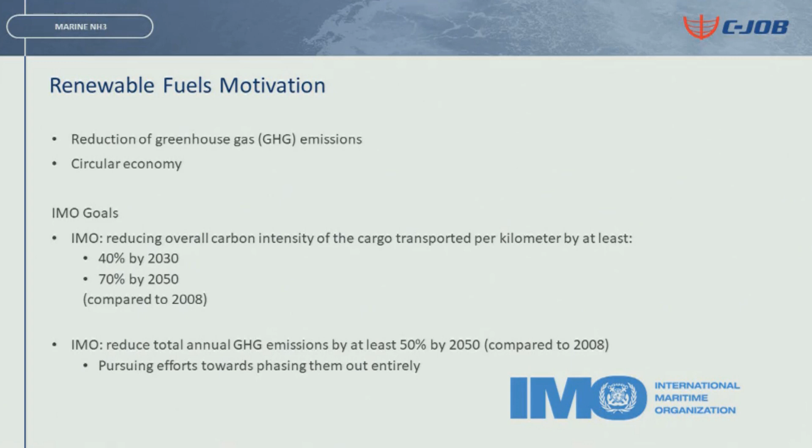Then when you look into ammonia, ammonia is actually not really well known as a fuel. Just keep it here - normally I'm used to walking, but sure.

Ammonia is mainly used as a compound, a vital compound for fertilizer, and global production is passing 180 million tons. So it's very well scalable, it's all synthetically made. Of course, this is still the gray method, as we consider, because the hydrogen used to make ammonia is obtained from natural gas, rather than the preferred way in the future where it's green ammonia, where hydrogen is obtained from electrolysis of water, preferably again with renewable energy.

Nevertheless, ammonia is ammonia, either way it's produced, so the knowledge and experience in these industries is very valuable to translate it to a fuel. Furthermore, it's used in cooling systems and also in DeNOx systems, which is then again in the form of urea, a CO2-ammonia combination, but also a very known technology.

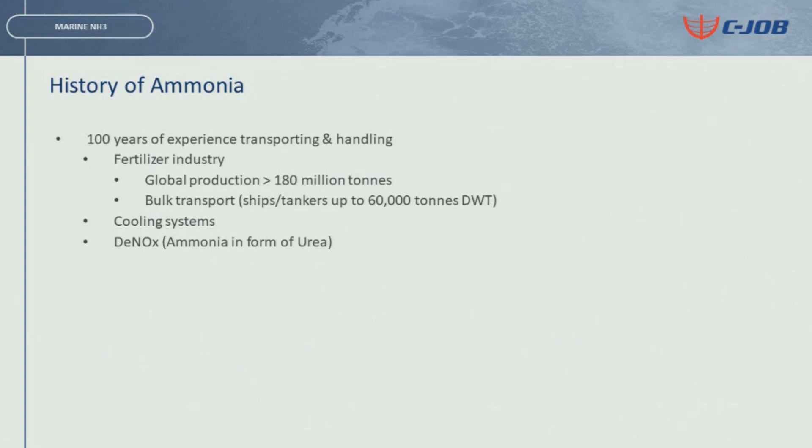Then some history. The oldest one I could find is from 1935, the director of Casale, which is an ammonia plant producer. These guys have ammonia plants, and instead of going to a petrol station, he thought: I have my own ammonia plant, I'll let my car run on ammonia. He did so by cracking part of the ammonia back into hydrogen, making ammonia-hydrogen blends, comparable to methane combustion properties, and then indeed combusted with spark ignition.

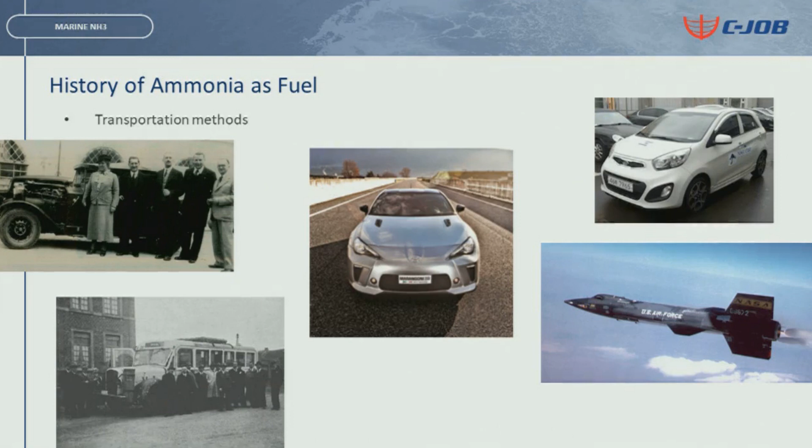Also, with the lack of diesel during the Second World War in Belgium, we see ammonia coming in, and also in the more modern applications, most of them dual fuel, are very technically feasible.

So then, why ammonia of all renewable fuel options considered? First of all, I would like to say a few words on bio versus synthetic. Of course, bio has a lot of potential in the near term, as the availability is already there to some extent, but the scalability is somewhat limited, and also not all bio is fully carbon neutral. So I definitely think bio has a part to play and a very good role, but then again, looking at the maritime industry, we'll need to diversify and share the market with different fuels.

Then when you go to synthetic, which is better scalable, you run mostly into these types of options. The most well-known one, of course, is liquid and compressed hydrogen.

For the record, this is without the consequences of a tank, so the mass of the tank and the shape of the tank are not included yet in these parameters. Nevertheless, the main parameters are very clear with the conditions you need to store it in, but also the cost, which is sometimes overlooked, to produce it. Because when we look at it, hydrogen has a clear disadvantage in volume, but in production cost it's one of the most attractive, considering it's the main simple and short compound you can make.

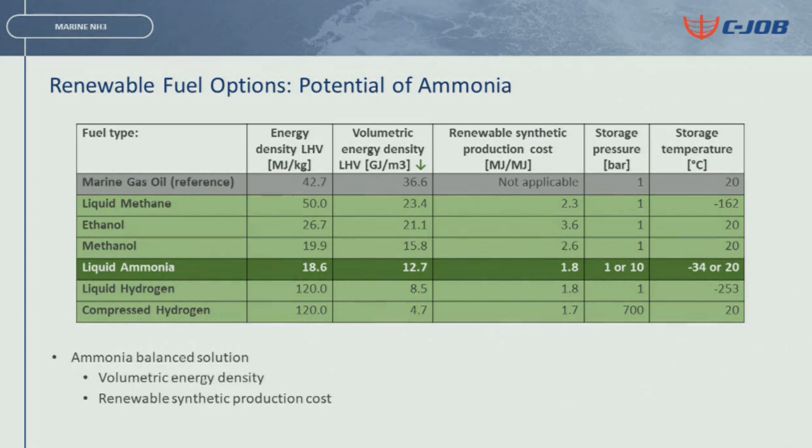So that's the reasoning behind ammonia. Now we go into technical feasibility, and to look at it, we first need to realize what ammonia is. Ammonia is a flammable gas. Yes, it's relatively harder to ignite because the lower limit is quite high - one of the highest lower limits I've ever found compared to other fuels. Also the bandwidth is not that wide. Furthermore, the auto-ignition temperature is very high, it has a low flame speed, and it consumes a lot of heat when it evaporizes from a liquid to a gas, which is not the most favorable property you could have as a fuel. Nevertheless, it can definitely be done.

Furthermore, of course, it's highly toxic. Small note on that, you can also very easily detect it, because everyone can smell ammonia when it's above 25 ppm. Of course, when it's too high, beyond 3000 or even higher, then you might not even notice it by smell, but you might notice it by other symptoms. Anyway, I wouldn't recommend that. So you notice it at a very early stage, and that's vital.

Then, considering these flame properties and the possibility of cracking hydrogen out of ammonia, ammonia hydrogen mixtures are also considered within this study, because ammonia hydrogen mixtures definitely improve all these flame properties and are capable of replicating those of methane - again lessons learned from LNG, very vital to make the next step.

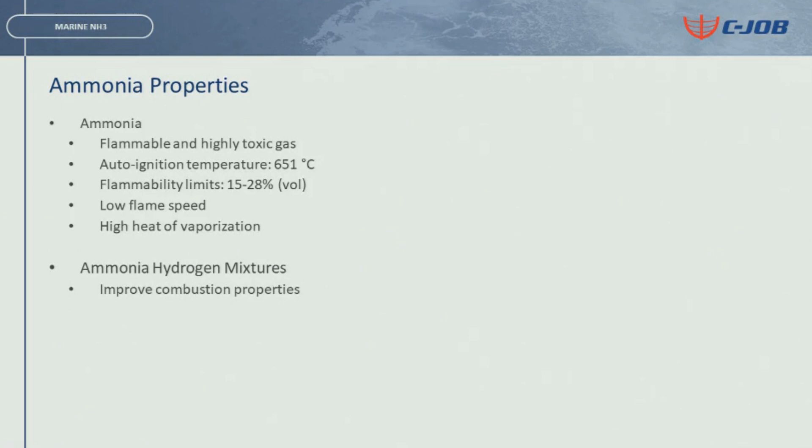Then we basically drew down everything we knew - or I drew down everything I knew - about how you could convert it. So we start with the steam turbine, which is very old-fashioned, of course, but yes, with ammonia you can burn ammonia. With the heat you can make steam, and steam can propel a steam turbine. So yes, this could be done. Then we have a gas turbine, more efficient and more compact, definitely. Then of course the very well-known internal combustion engine, both compression ignition and spark ignition.

Then we have fuel cell technology, of course, more and more. Then we have the PEM, which is already quite mature and already applied in cars, buses, heavy trucks, but also submarines. So this is becoming more and more into play, but then hydrogen storage is the bottleneck in that sense. So if you can work with pure hydrogen, PEM is a great solution. If you don't have pure hydrogen, it might be very tricky because you need to crack and purify your ammonia. PEMs do not tolerate ammonia that much - it's down to below 1 ppm, I think it's even 1 ppb, so that's parts per billion. It needs to be very pure because ammonia will pollute your PEM.

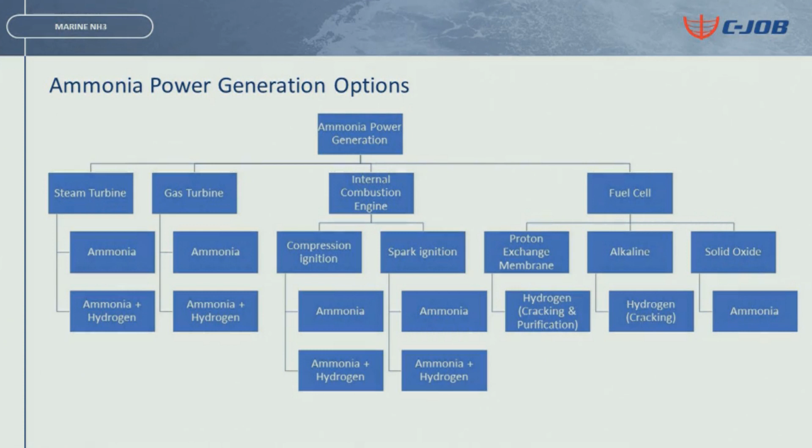Alkaline does not require purification, but does require cracking. And then preferably, of course, the solid oxide fuel cell, which can handle ammonia directly. Well, long story short, they're all feasible, technically. If you're happy with the performance, that's an entirely different matter.

So, looking into what we're talking about here, ships - and in this case specifically the ammonia carrier - because in our view, one of the first vessels which will use ammonia are the ones already carrying it. Of course, you will not find ammonia carriers on marine traffic because they're all camouflaged as LPG tankers, because ammonia and LPG again have a very nice bond, because the storage conditions are very similar. So again, lessons learned from those, and also engine developments on the LPG front can partially be applied for ammonia as well.

When it comes down to converting ammonia into power, we see the ammonia hydrogen blends. In case you only consider renewable fuels, ammonia diesel I will come to later. Ammonia hydrogen blends are the most interesting.

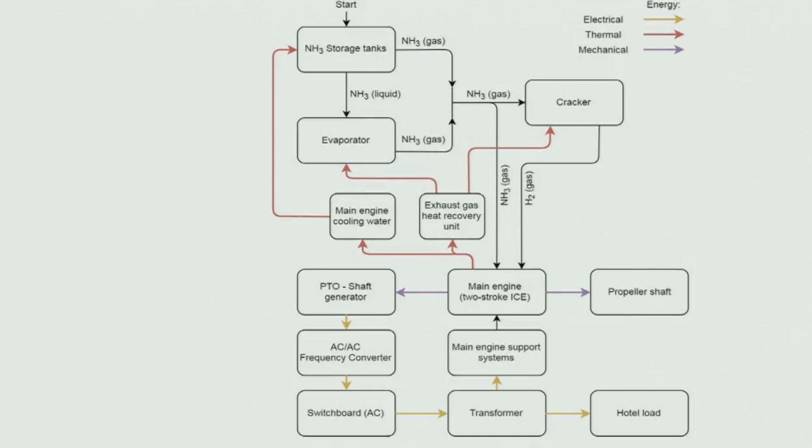Before going into fuel cells, I would like to address the most, or at least from the public's point of view, the most concerned topic for ammonia, which is NOx, and possibly also N2O. Going into this, it was very nice to see that when you study IMO Tier 2 levels, the scale of the engine doesn't really matter. It's mainly the operation, so the rotational speed of the engine.

When you go to experiments done in the past and present for ammonia, so real tests, but also, of course, experimental studies, they show that actually the small engines on high speed do very similar when it comes to ammonia hydrogen combustion. So to say something about this, we need to understand why these are in similar ranges.

When you look at the physics, we of course expect more NOx in a sense because we have more nitrogen. Nevertheless, the average temperature of the entire exhaust gas with ammonia and hydrogen is lower compared to diesel. Furthermore, with ammonia hydrogen combustion, it's a homogeneous blend. Where diesel is sprayed out over a wide area, ammonia hydrogen is more homogeneous, so also peak temperatures are lower.

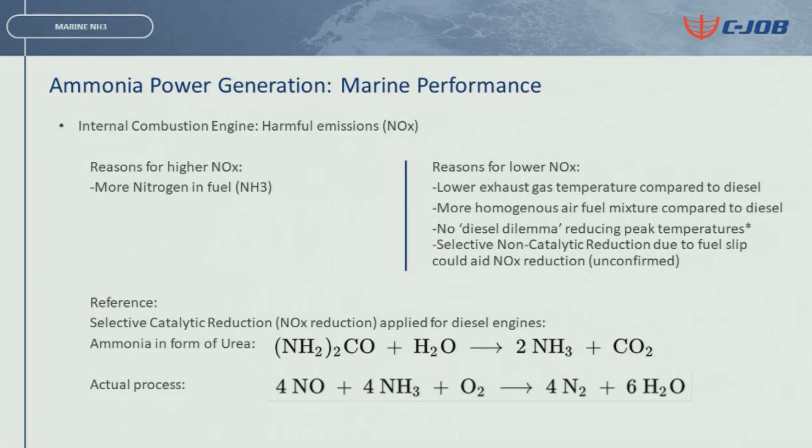So from a literature study, based on that, we conclude that for now it should also still be in similar ranges. It could very well comply with IMO Tier 2, or just about.

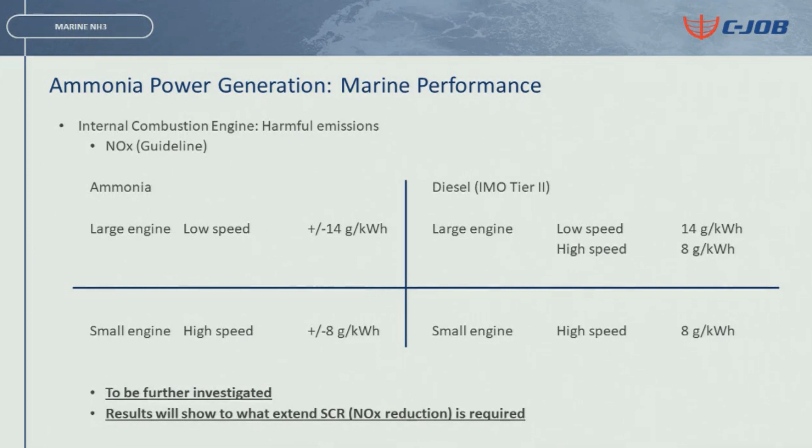But either way, to comply with IMO Tier 3, we definitely have to have SCR, which is fine in my view, because ammonia DeNOx systems are already commercially available, they run very well, and they run on ammonia in the end. So we didn't see a big issue there. It also, in that sense, covers the ammonia slip if you might have it.

Onto fuel cells. For fuel cells, again, we have the same output, so propeller shaft and hotel load. But again, this is the point, because you're converting a ship which is sailing fuel direct, or diesel direct, more commonly known, to a fuel electric configuration.

So the losses of the electrical system are an addition in this sense to the fuel cell configurations. However, when the ship is already fuel electric, fuel cells might become more interesting earlier.

Nevertheless, you see the electric system, but also the cracker, which requires heat input because the PEM is a relatively low temperature, so this is a loss.

Also the purifier needs to run, so also that is a small loss. And of course they require space, but in energy sense it's less efficient due to these parts.

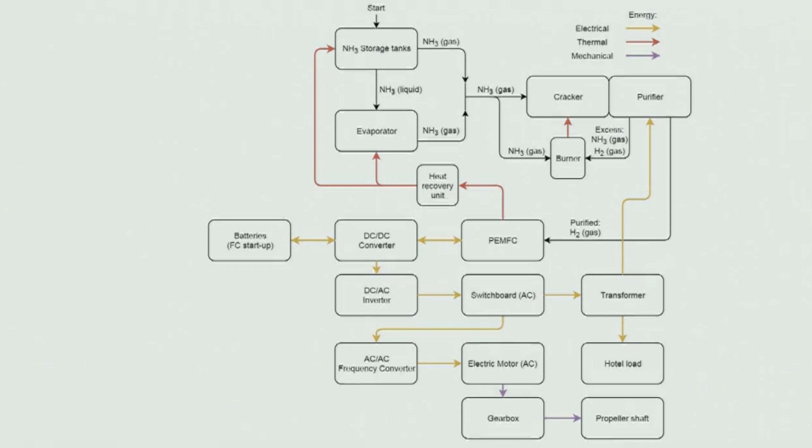But still, if the PEM is still efficient enough, it can do very nicely. Moving on, the alkaline fuel cell has a similar setup, only no purification.

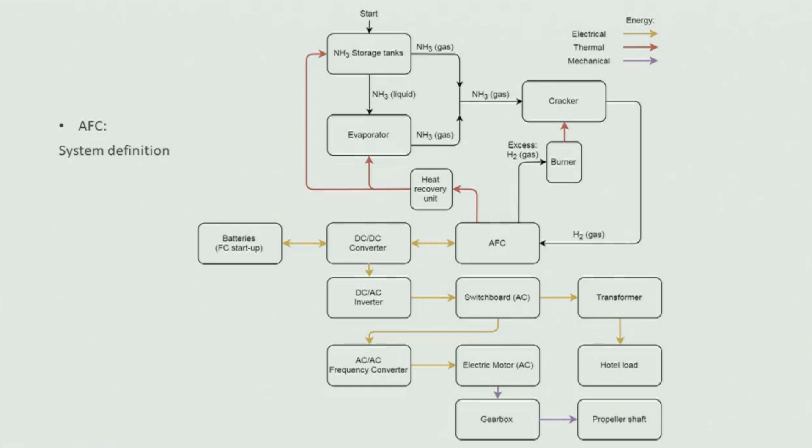And then the most preferred fuel cell in my view, which is the solid oxide fuel cell, can completely drop everything here and focus on direct usage.

Then, when you start comparing them—and of course this is with a note, because the solid oxide fuel cell is going through a lot of developments, of course all fuel cells are, but especially with these notes, this is a moment in time, and also with certain assumptions.

Because I was already told that the load response for the solid oxide fuel cell for some technologies is already at similar levels as internal combustion engines. However, if that be so, they were not able to tell me what the consequence of that was to the power density.

So it really shows that the solid oxide fuel cell has a lot of potential, but still has to become more mature to be actually implemented.

It also shows that the others are quite well performing overall, and we'll get to efficiency in a minute. And still, of course, some emissions remain with the internal combustion engine.

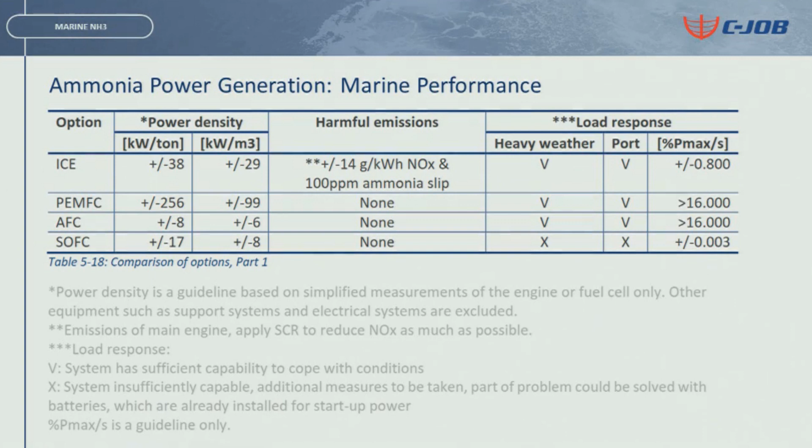When you look at the system efficiency, we see that the solid oxide fuel cell in the end wins it, or is the best compared to the others. Nevertheless, it is also very costly at the moment.

So even though it's more efficient and it compensates its higher capex with lower opex in fuel, it still doesn't beat the internal combustion engine today.

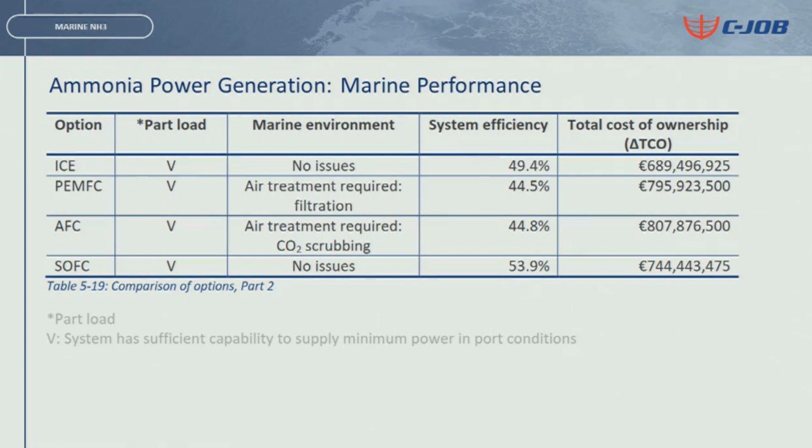So, long story short, we see that the internal combustion engine is the way to go for now, and the fuel cell has a lot of potential for the future, but needs to become more mature. So if you would like to use ammonia within the near term, you definitely have to stick with the internal combustion engine.

Then it is of course an interesting discussion to compare compression ignition, which would be homogeneous charge compression ignition, which has its own challenges—I could also elaborate on that, but for the sake of time I will not. Of course spark ignition will offer you the most flexibility in operation of the engine.

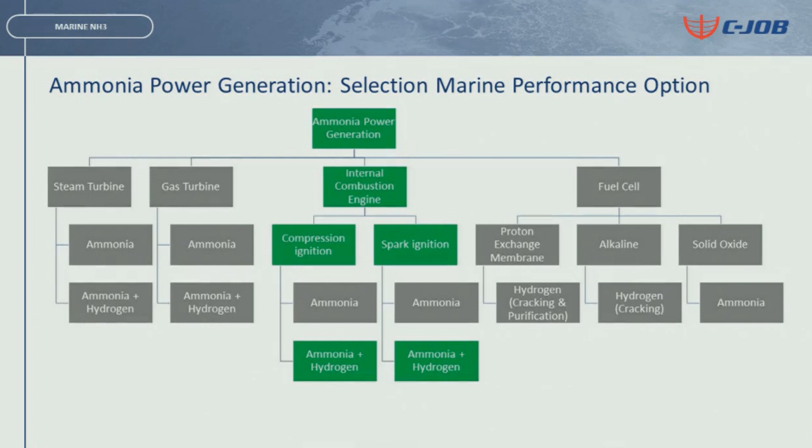But either way, this is something to be further investigated. For now, the internal combustion engine definitely seems the way to go.

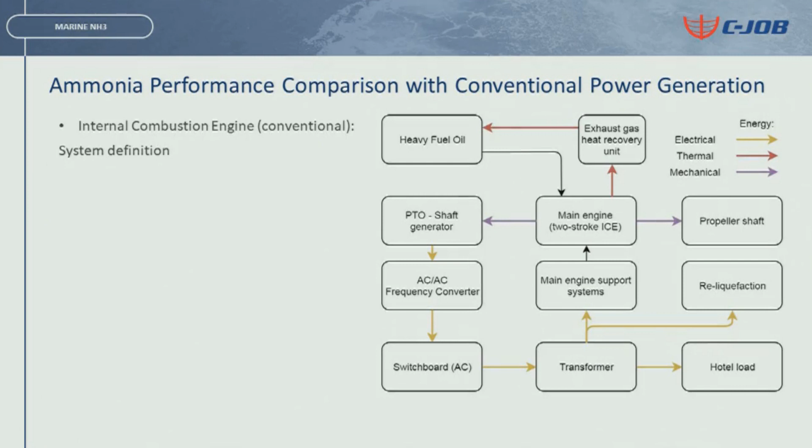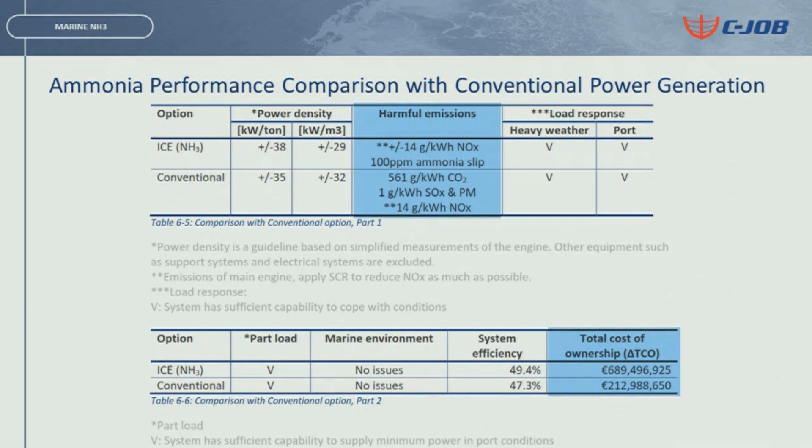So it was a conservative ammonia price of 850 euros per ton. In respect, grey ammonia costs about 300 euros per ton now. And there are numerous places already which can deliver green ammonia at around 400 as well, so then it becomes really competitive. Because when we look at cost to a further extent, this is making it more interesting, because some places are already capable of delivering green ammonia around these ranges. Of course, they need to expand and grow, but the pilot plants are definitely there.

When you introduce added value of clean transport, for example, by means of CO2 taxation, you can level the playing field quite nicely. So these are aspects to consider, because in the end, for now it's not economically feasible. But if a ship owner finds a cargo owner who's willing to pay more for clean transport, it could make a world of difference, because transport costs for most products are just a very small amount. However, for the ship owner, it's a huge difference.

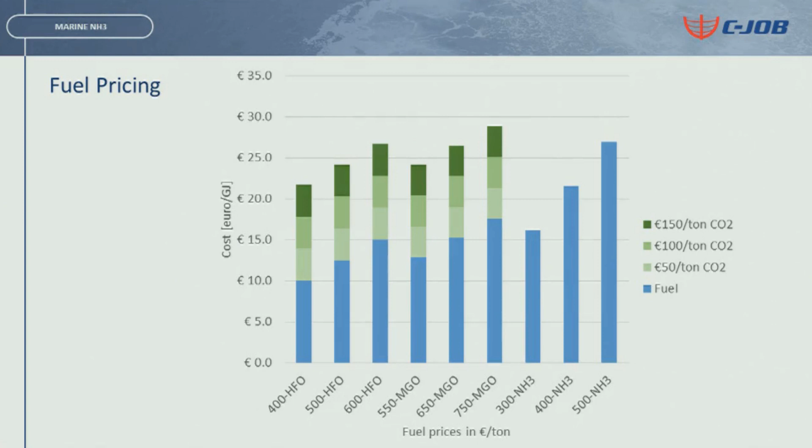So that's the first part that could help and accelerate the adoption. Furthermore, of course, making fossil fuels more expensive could be very helpful. And next to that, the main bottleneck at the moment is the amount of renewable energy. If we expand the renewable energy production, costs will go down, and also the renewable fuels made from green electricity will go down as well.

However, to make such a jump is quite radical for a ship owner. Ship owners are relatively conservative, and I understand that, because they make huge investments, they need to work with them for 20, 25, maybe 30 years. So to be able to fall back on reliable technology, which they know, is very important.

And ammonia diesel does enable this, because in case the ammonia system would fail or not work in any way, you can always go back to full diesel combustion, which guarantees the operation of your vessel, which is vital. And with ammonia diesel, you can go to very high ammonia blends. Think about 95% ammonia, 5% diesel in terms of mass, which is definitely feasible. Then you already have significant reductions.

Of course, as long as you have an internal combustion engine, you will definitely require SCR, but this can definitely be arranged. So ammonia diesel is a vital intermediate step. It could also be considered that you skip this step by extending the ammonia diesel period and awaiting solid oxide fuel cell developments. Either way, lots is ongoing, but definitely ammonia diesel seems to be the first station for ammonia.

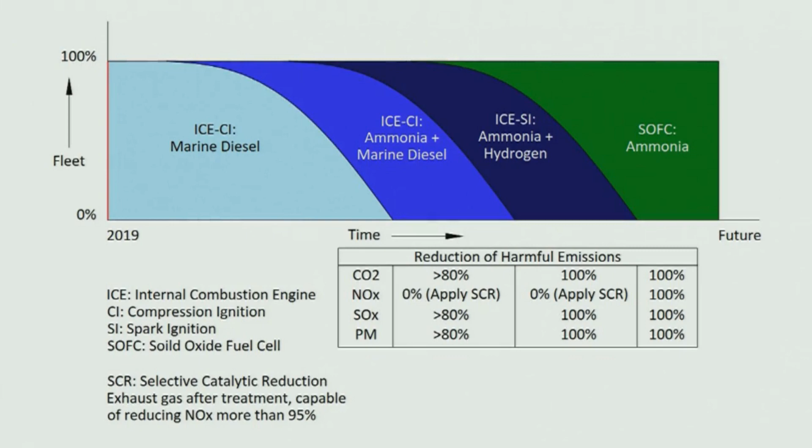Then some words on safety. I will start with this because safety is quite a perceptive definition, because they all seem safe. This is an industry we've done for years, and also new industries offshore done for years, more and more.

But either way, they can go wrong. You might not know, but these things happen, and these things occur, but they don't withhold us from continuing doing this kind of business. So we need to draw a line somewhere, what we consider acceptable and what is not acceptable. And yes, there will be incidents, but we have to reduce the likelihood and the severity of these incidents. And still, then you need to find a balance.

So when you look at ammonia, you normally fall back to rules and regulations, which is the first guideline for safety as well.

You see that a lot of regulations are already in place when it comes to bulk transport, similar to natural gas. However, when it comes to natural gas as a fuel, with the IGF code eventually adopted, it's already implemented. However, for ammonia, the IGF code is a very nice and important foundation, but there are no specifics.

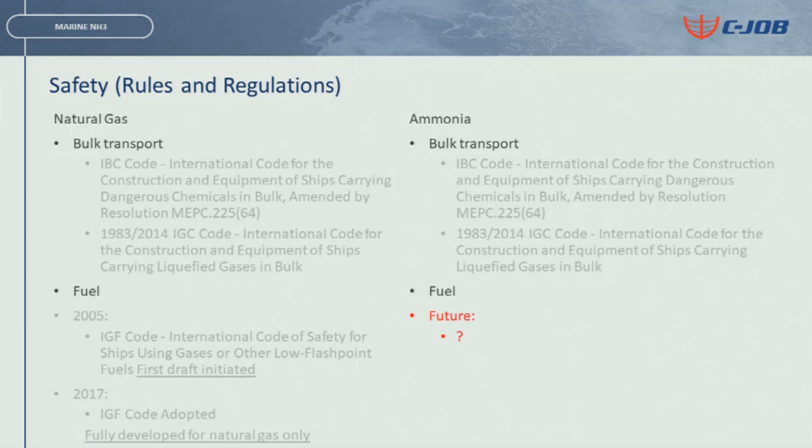So risk-based design is essential. And when you do risk-based design, you just need to use common sense, look at the physics, and try to assess it. When you do so for ammonia, you compare it with compressed natural gas, liquid natural gas, diesel, and ultra-low sulfur fuel oil.

The reason for ultra-low sulfur is because HFO is such a variety that the safety data sheet did not specify what HFO really is, since it varies from point to point, whereas ultra-low sulfur fuel oil has very strict requirements. So when you compare them on flammability, we don't see much.

No new items occur, because flammability of a gas is relatively well known. Also, when we look at the environment, although the impact type is different, it's definitely labeled already as very toxic to aquatic life with long-lasting effects, which is known in the diesel variants.

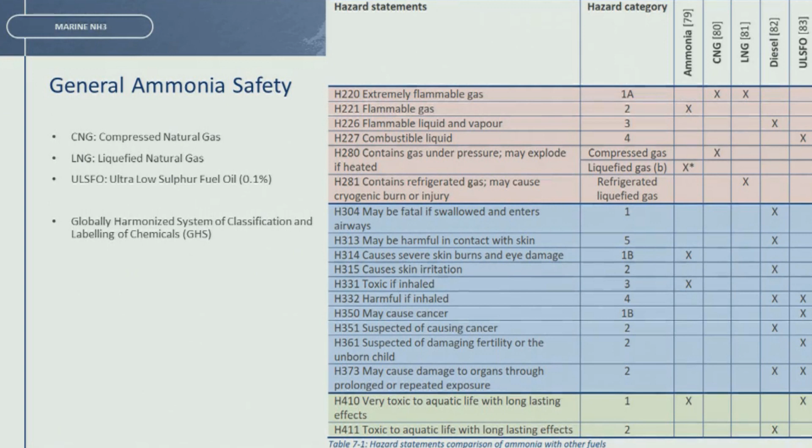However, ammonia is toxic if inhaled, and also causes severe skin and eye damage at high concentrations, which is totally new compared to the other fuels. So this is an essential addition to safety when you do such an assessment.

So all toxicity alarms would have gone off before it even becomes flammable. Of course, in spaces with high likelihood of ammonia concentration, it's definitely needed to also incorporate flammability measures. Furthermore, the toxicity to the environment remains and is also a very specific continuation of that.

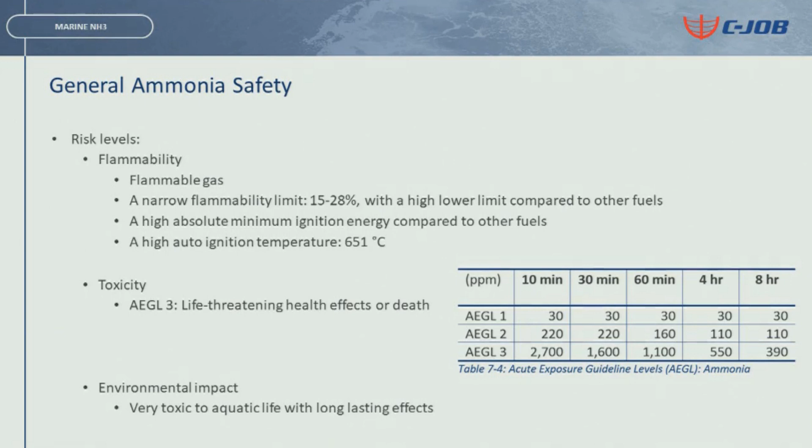To do so, I set up a fuel system diagram, and I'll walk through it by identification, analysis, assessment, and mitigation, all based on similar guidelines of the IGF code.

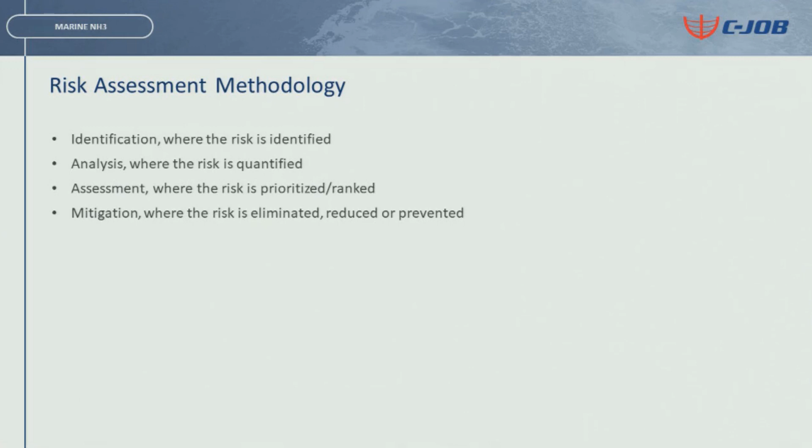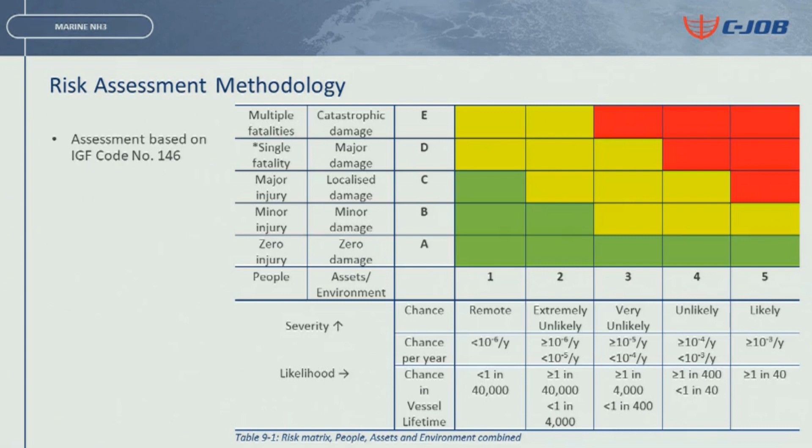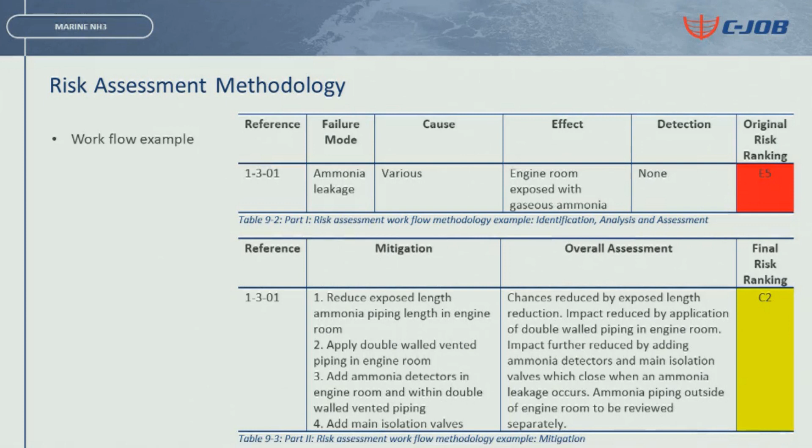Doing so, I find it quite important to be as non-biased as possible. So the fuel system diagram I started with had zero safety measures. Even the obvious ones, I did not include them. Why? Because I wanted a valid reason to include it or not, so as to be as non-biased as possible yet again.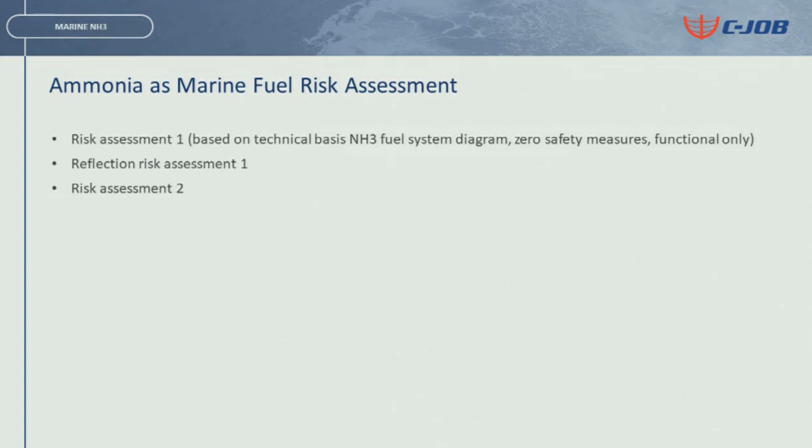Based on that, we do the assessment, we reflect on it, and also do a second assessment and reflect on the additional mitigations I applied, checking if these mitigations also did not add any unacceptable risks.

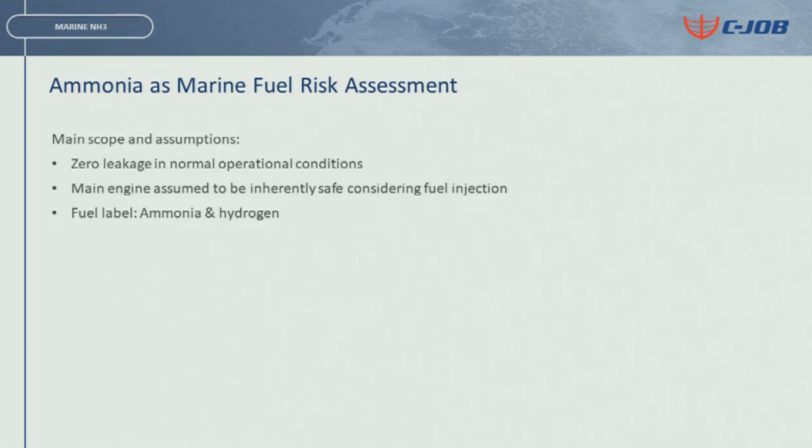Of course, also the engine itself as a block was assumed inherently safe, so no leakages once it's in the engine, which is also very dependent on the time you inject the fuel. And ammonia and hydrogen are labeled as fuel on the ammonia carrier and no longer as cargo, which is also vital in rules and regulations.

I'll add some color to this. You would see that the beamer does translate it a little bit. Okay, believe me, this part is green, and this part is orange.

What we see here is the liquid part coming from the cargo hold directly, which needs to be evaporated, and then of course the boil-off, which is normally compressed back again into the tank, now can be used with a compressor and combined with evaporated ammonia here. Then it's separated with part ammonia injection with the gas regulating unit, and the gas regulating unit for hydrogen, which is cracked here.

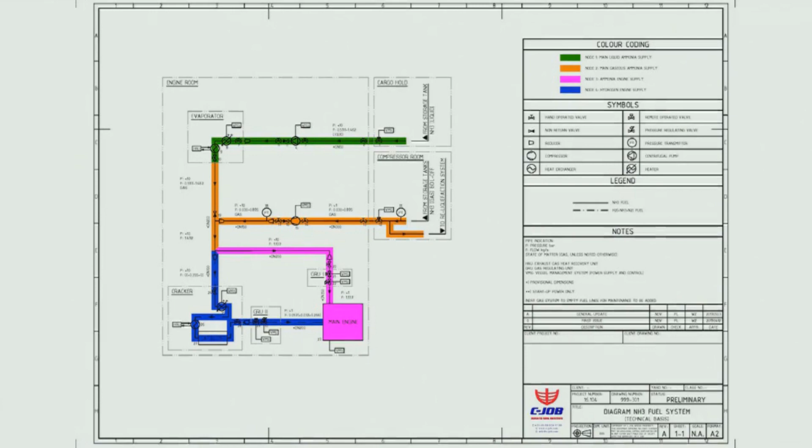That's what it basically comes down to, and it's all in the engine room, and it's all single walled. Then, when you assess it, you definitely encounter lots of risks, which are unacceptable, because red is unacceptable, yellow is tolerable but should be reduced if cost effective, and green is acceptable.

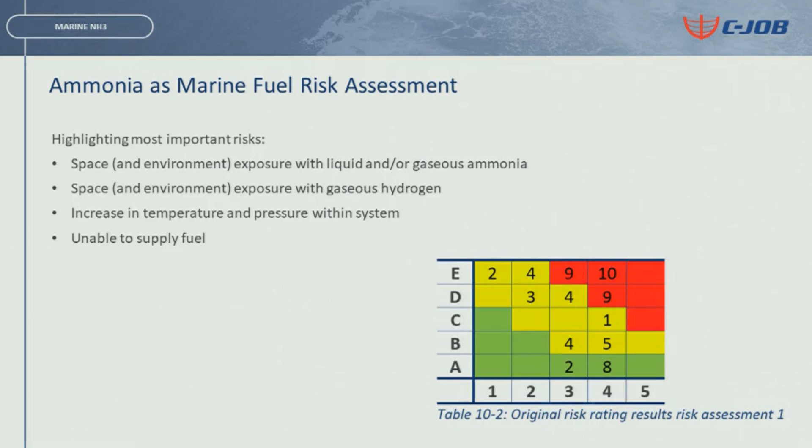Well, obviously, ammonia leakages are very dangerous, so they rank in the red area, and also other items like unable to supply fuel resulting in a dead ship are also unacceptable. So again, assessing that really shows the necessity for mitigation.

When doing so, actually the type of mitigations are very similar to the ones in natural gas. However, ammonia should never be labeled as natural gas, but the lessons we learned and the technology we have from natural gas are very useful, because it all comes down to detection, ventilation, pressure relief, and isolation. Furthermore, of course, routing of piping from a certain distance, double wall piping in certain spaces, and of course redundancy.

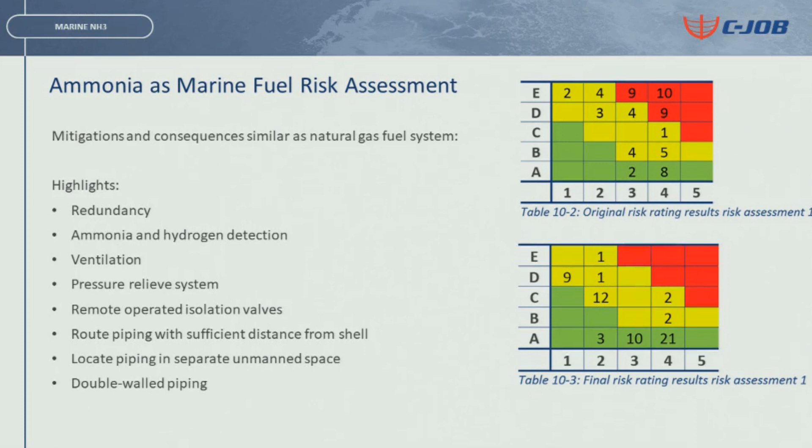So don't be shocked, but it does blow up the system a little. Again, I'll add some color. Here you see the liquid supply with evaporation, and of course the boil-off supply. And don't be fooled, this is just mirrored to cover the redundancy. And you also see that all the equipment is in a separate room.

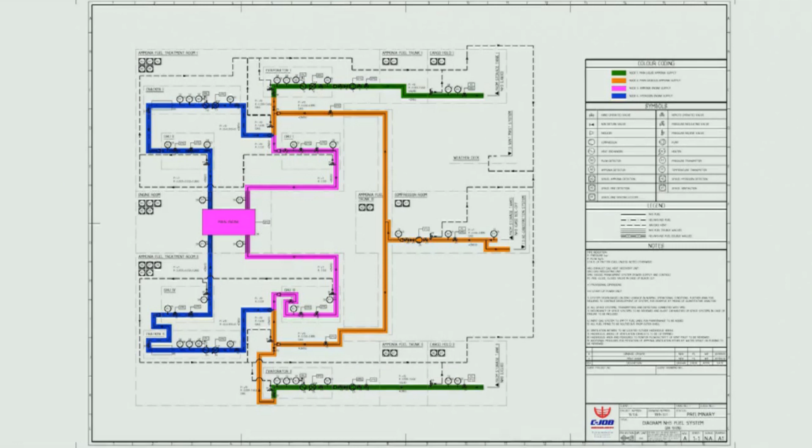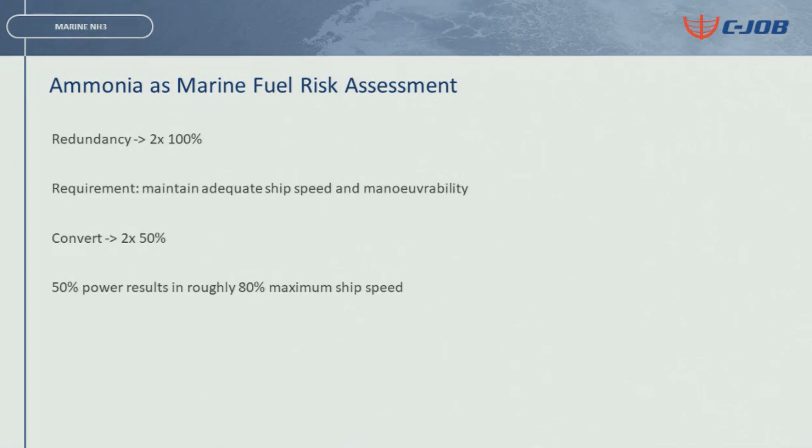Meaning that ammonia diesel is definitely attractive because it reduces the investment cost in that sense. In that sense, also the redundancy was first applied 2 times 100%, but this is definitely not needed, because the main requirement was adequate ship speed and maneuverability, whereas 2 times 50% will definitely suffice that requirement. So it was reduced in scale, just to cover lower capex.

Also, that assessment, investigating these additional mitigations, really showed that, of course, there are more risks, but not on higher levels already encountered.

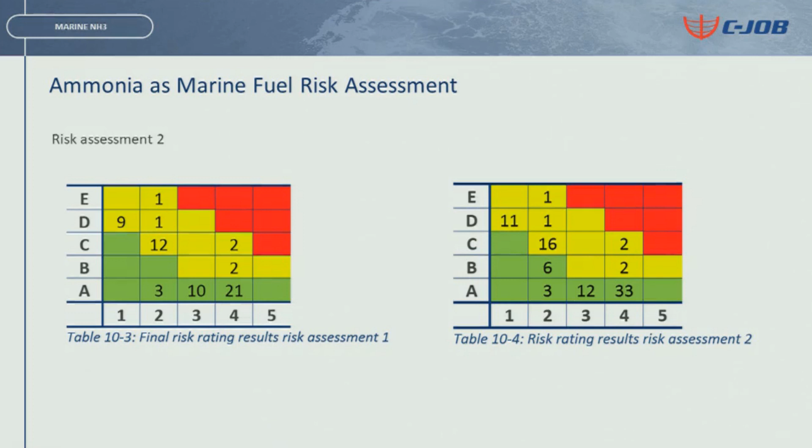As a conclusion, we've seen the reasons why ammonia could be attractive as one of the fuels for shipping, the technologies you can consider, and of course the safety measures you have to take. Some outlooks, of course, the timeline with ammonia diesel as a first step. So further research in combustion is definitely required, because we're the ship designer, we're the system integrator, specific components need to be further developed.

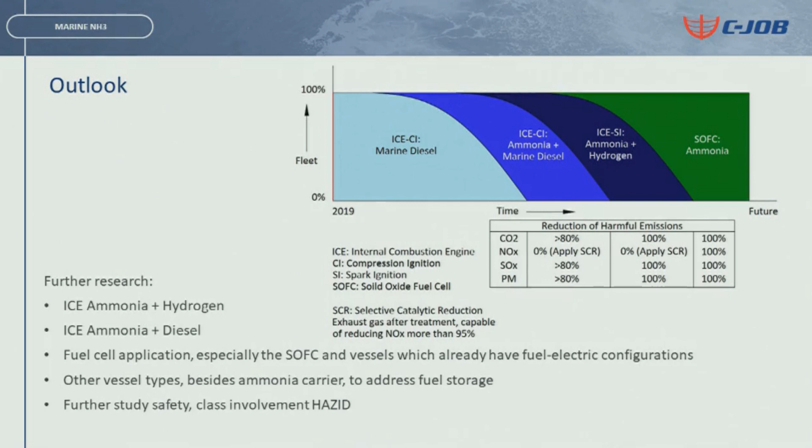And of course, this is just an ammonia carrier. Also, ships not carrying ammonia can definitely be one of the vessels to be investigated further. Also considering fuel electric configurations for vessels already. Next to that, the HAZID should be further detailed to further clarify and eventually define rules and regulations.

Anything to add to that? Yeah, that's basically what it comes down to.